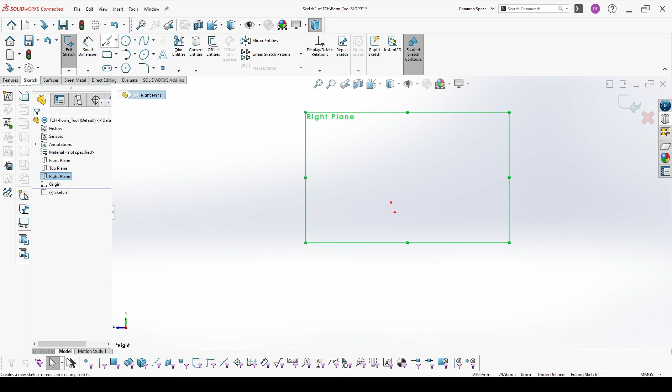In school we were bending the leaves by hand, but in this case I will use a form tool to have a nice shape of a tulip leaf. We start with the drawing in the right sketch plane.

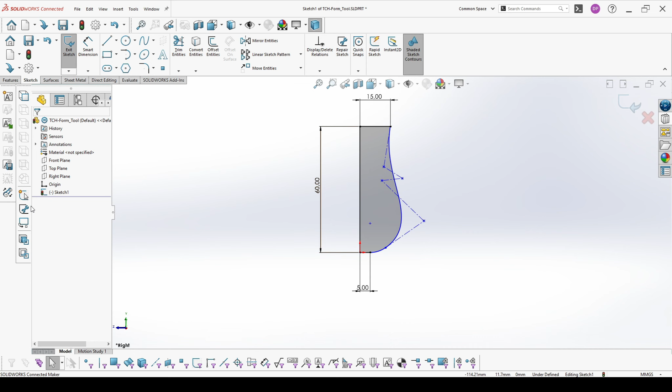Then we make a revolved boss base on 180 degrees, mid-plane. Then we add another sketch here to form the other shape of our leaf.

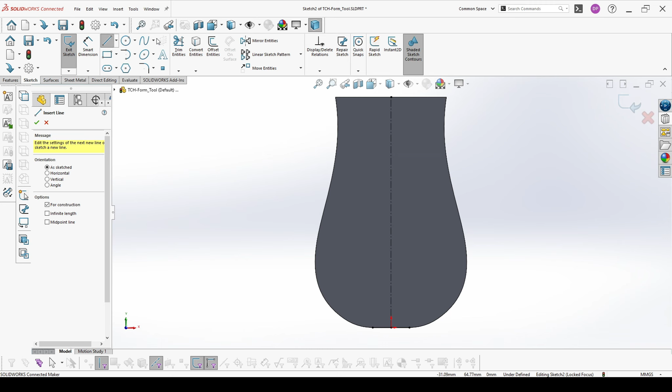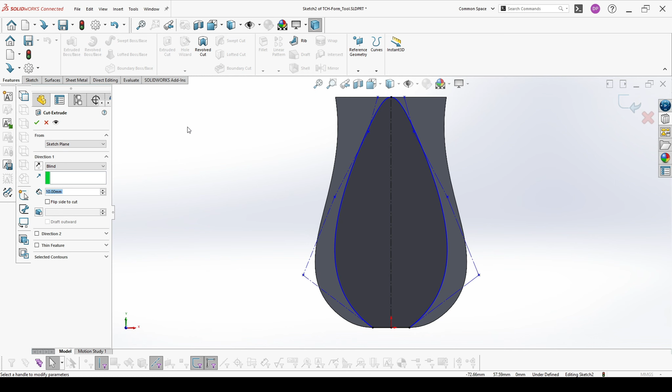Mirror this line so it's easier to control the shape in the way you want it. Then we will extrude cut with flip side to cut through all.

Move this face with 8 millimeters. And we have to form a little bit here the shape.

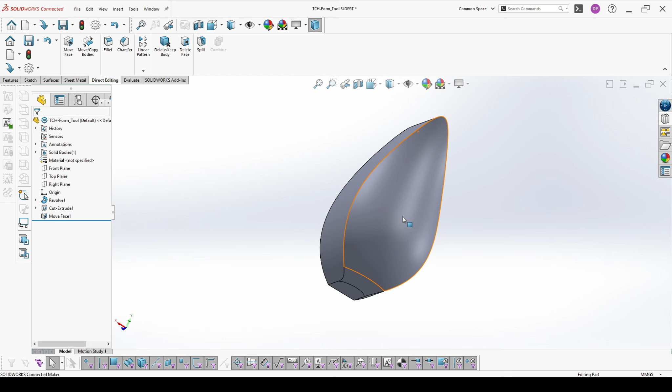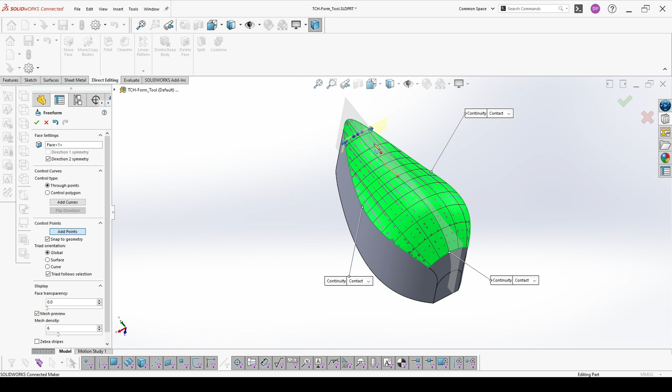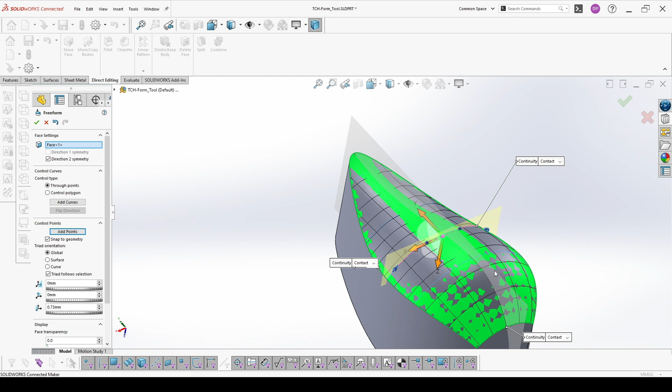For this I will use the freeform feature with symmetry. I will add some curves. Then I will add some points. And in the spaces where the leaf becomes wider, I will add some additional points. Then we go to move these points. And this is the shape of our leaf now.

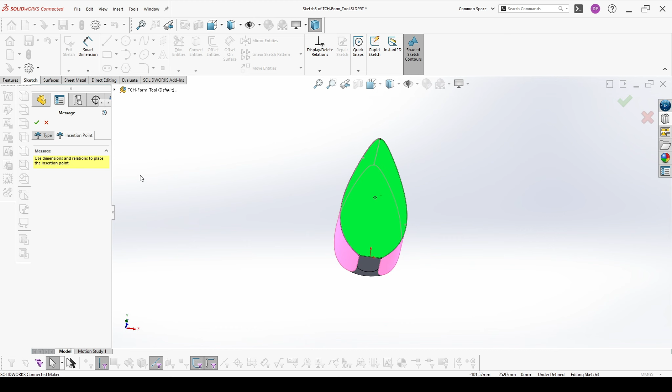To make it a form tool, we go to sheet metal, forming tool, choose a stopping face, choose the faces to remove. You can also move the insertion point from the other tab. I will leave it like this. This is how it will look as a form tool. And then we save it as new.

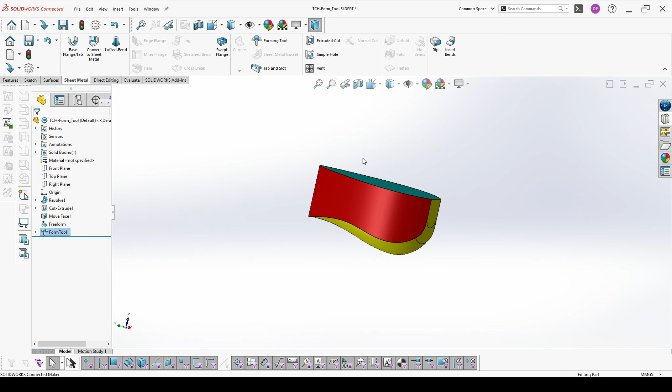Choose from the drop down menu form tool, and it will lead you to the forming tool library. Now, when our form tool is ready, our next step is to use it to form our leaves. We will need two versions, one for the inner circle and one for the outer circle of our tulip.

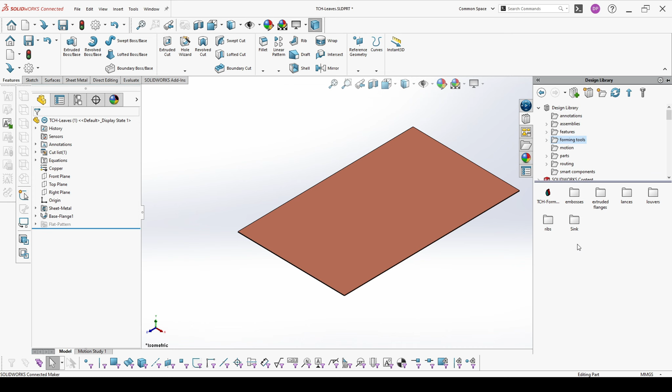To form a leaf with the form tool is really easy. We need a square metal sheet. We go here in the design library, forming tools, pick the tool we want to use and just drop it on the face. You can position it if you wish. I don't need that. I will just leave it like this.

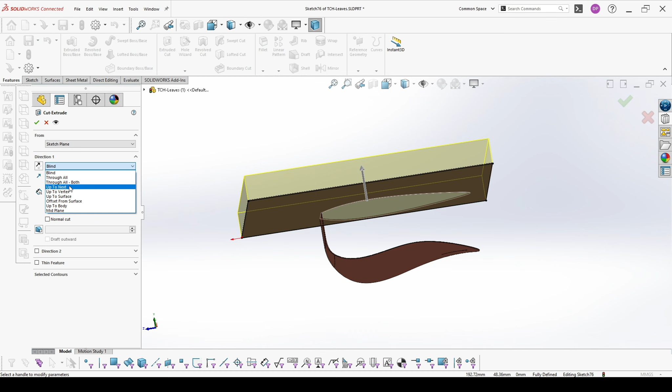Then we have to cut out the not needed parts. And this is the base for both inner and outer leaf. We'll just go to the other configuration and unsuppress it.

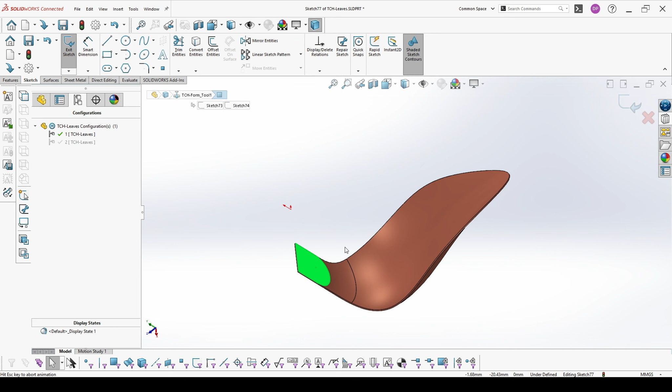Then we add another sketch. Convert this. Add a circle with a diameter of 4.2. Then define the area that we want to cut out.

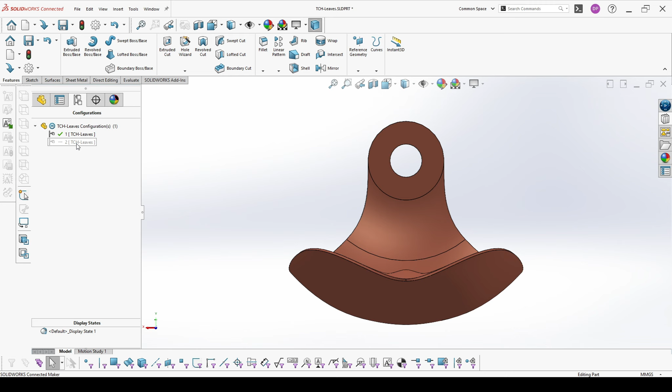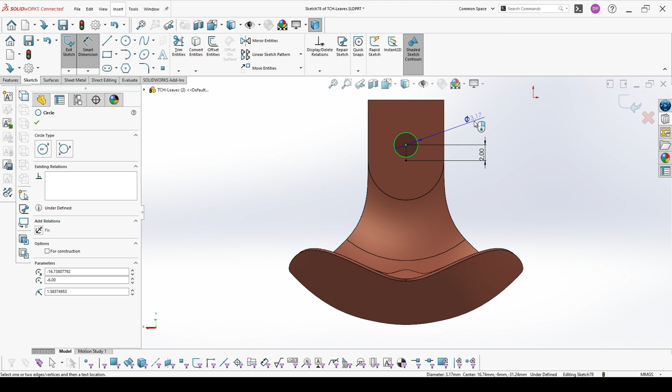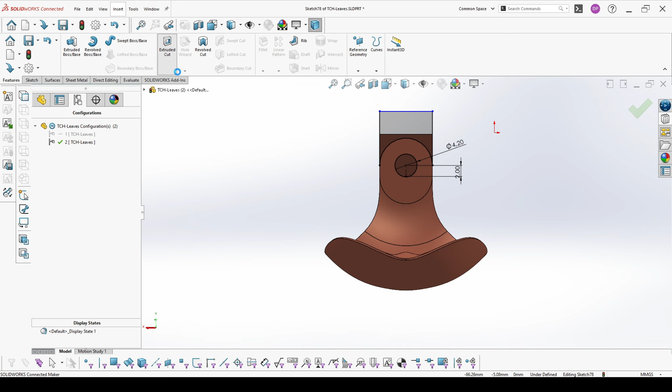And we go to the second one. Also add a new sketch. Here the hole will be on distance 2 mm from the other one. And both outer and inner leaf are ready.

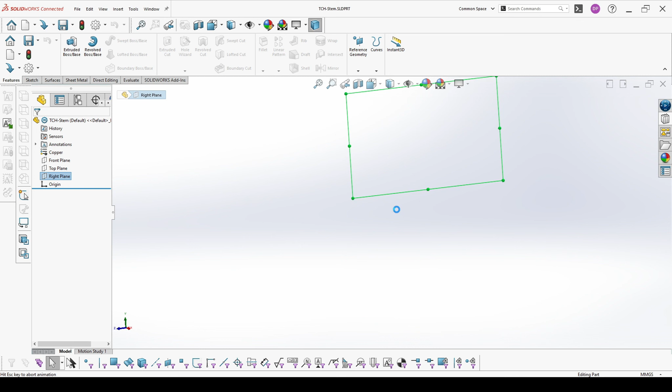Our leaves are already ready. Now we have to form the base, or as I call it also, stems of our tulips. For the stem I go to the right plane, add some center lines to define the sizes.

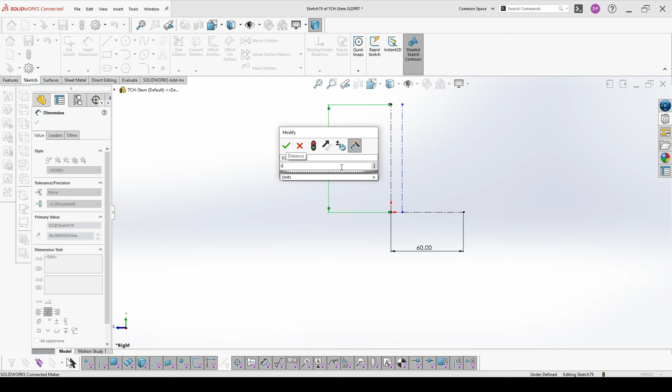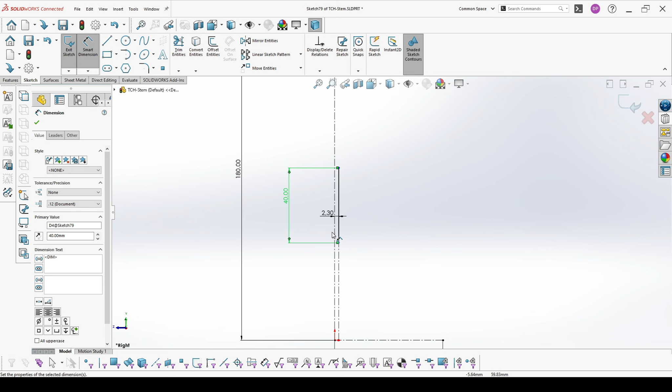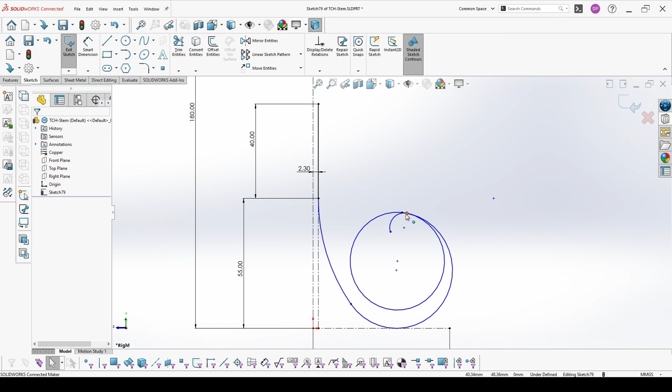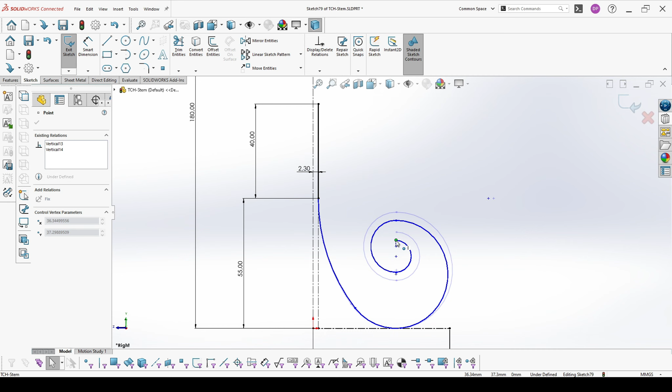And start making some profile. Then we make the top part.

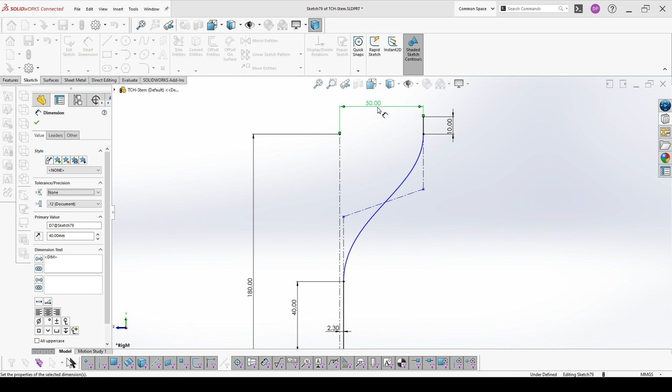And then we go with swept boss base with circular profile, 4 millimeter. I will round this edge here. Here on the top I will add a thread.

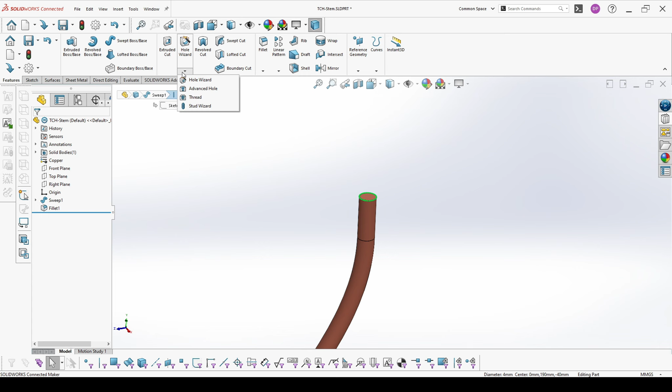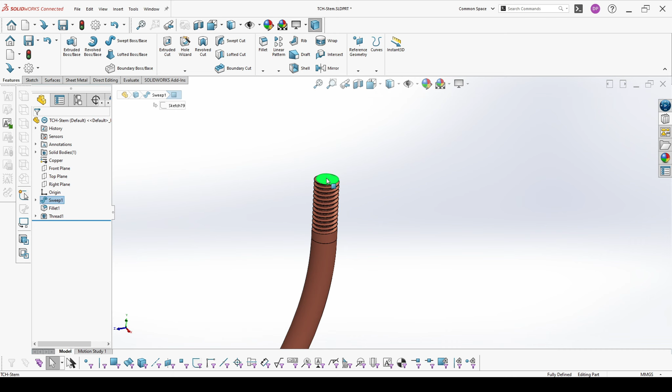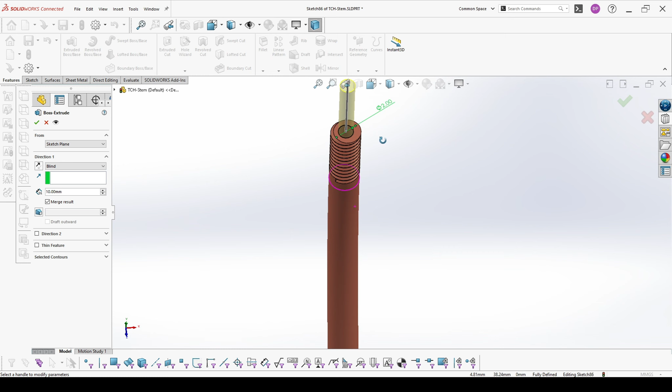Also I will add a new sketch with a pin area on which we will put our candle. We need also chamfer on the top.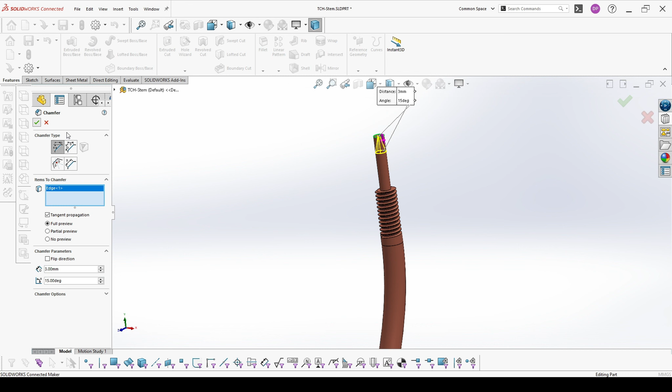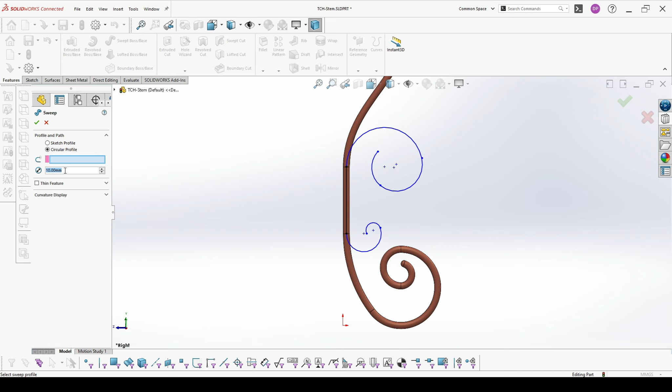I would like to add another detail. I will go again to the right plane. And we'll make another swept boss base with a circular profile of 4, not merging it with the previous one.

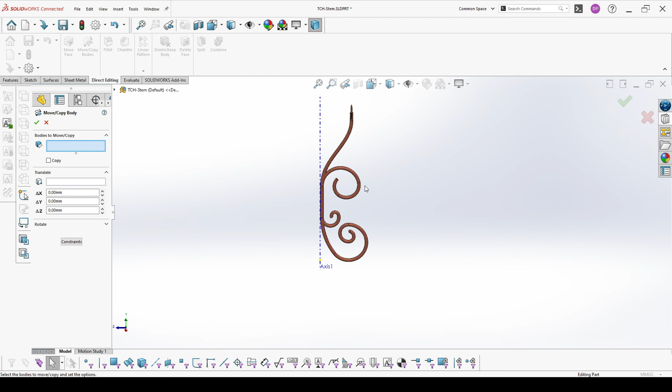Then between the right and the front plane I will make an axis. I will move this around the axis. We go to direct editing, move bodies. I choose this body. I want to rotate it around this axis on 30 degrees. Or actually on 60 degrees.

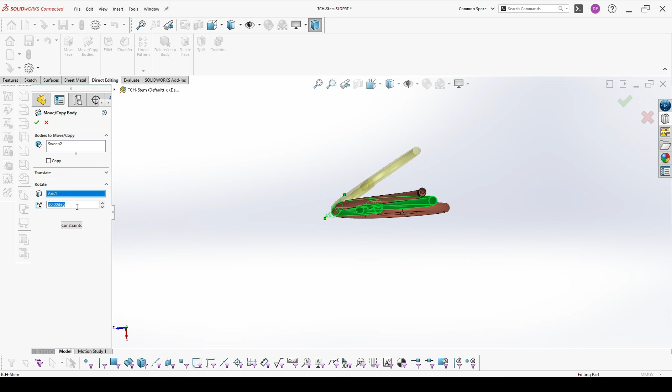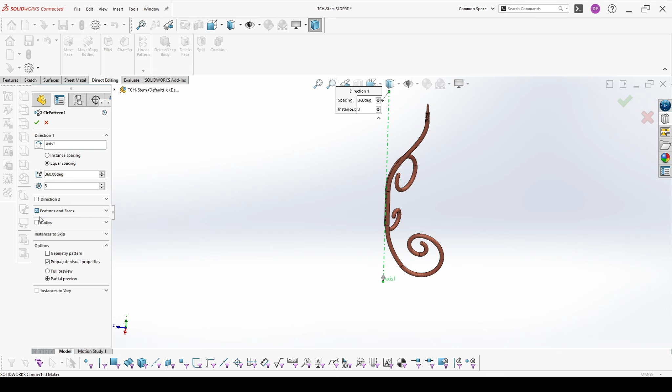Now I want to add also fillet here. And I want to repeat this 3 times. I add circular pattern around the axis. Choose bodies. So here it is.

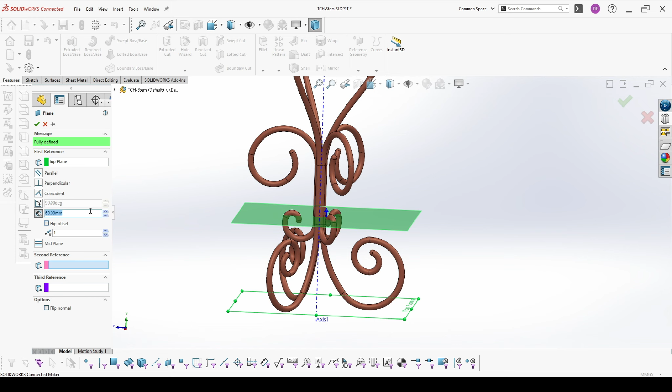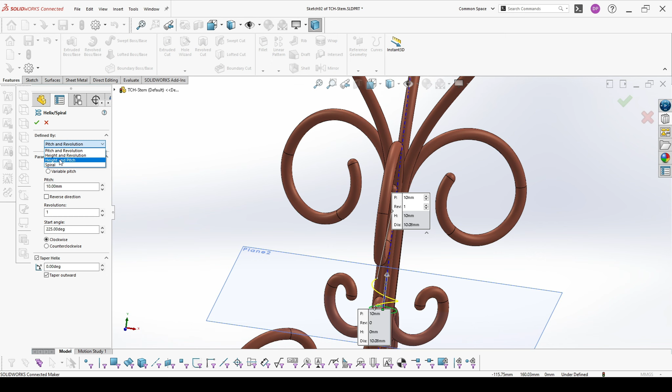Then from the top plane I will make a reference geometry. I will make a sketch on it. From this sketch I will make a helix. I will choose height and pitch. The pitch will be 1.2 and the height will be 40.

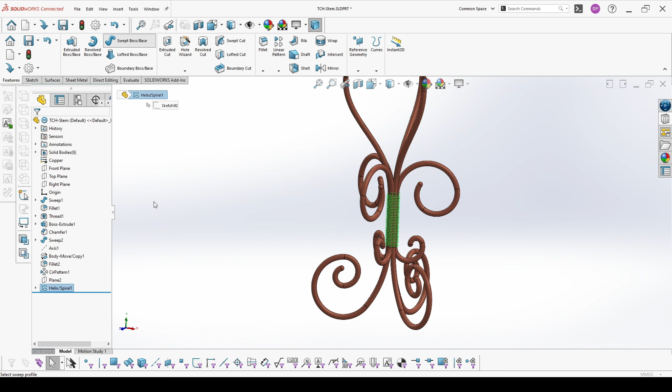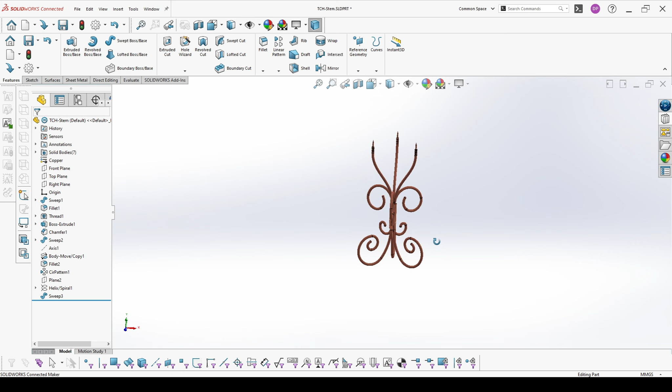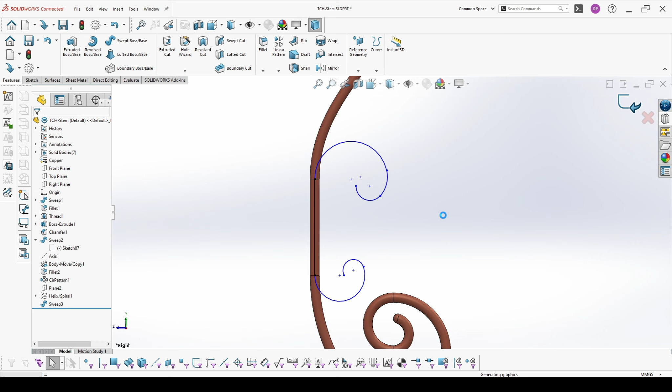And we're ready to assemble. With all parts ready, the only thing left is to assemble all together. First we insert the stem and leave it fixed.

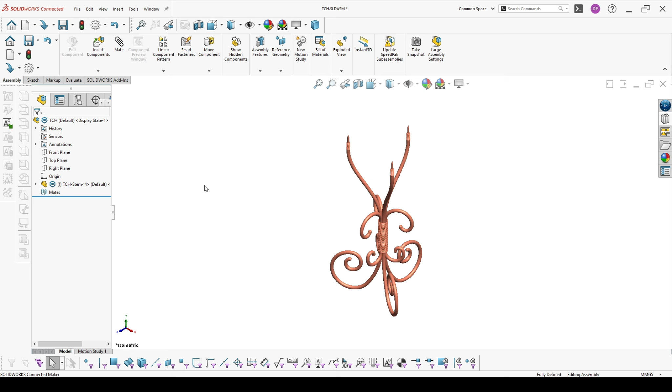Then we go to the design library, toolbox. At the toolbox we need a nut. I will choose the thin one with the size of M4.

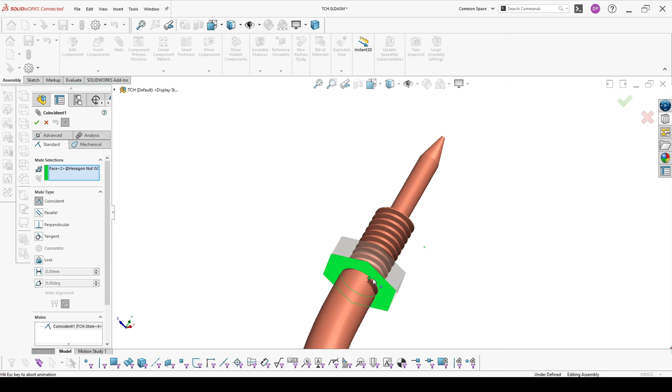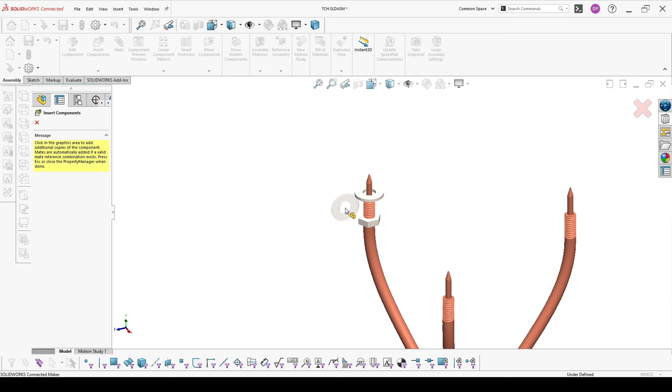Then I will need a washer. And last, I will need my leaves. First we will need the outer one.

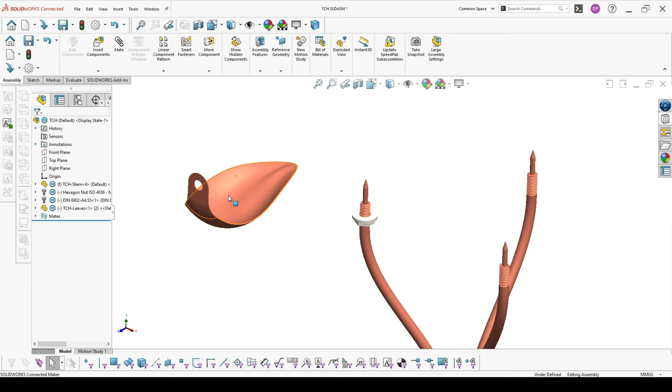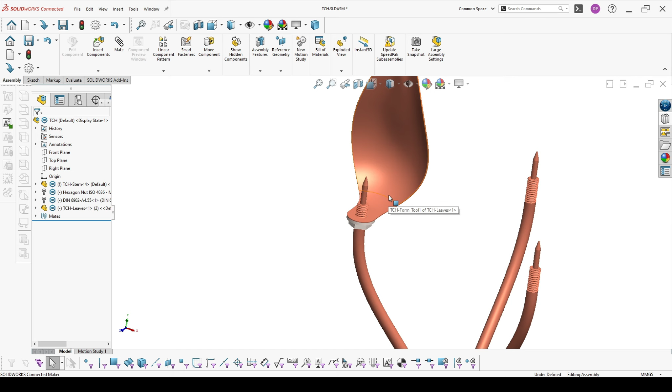Then we have to add a second leaf. It's concentric and coincident to the first one, and the right planes of both should be at 60 degrees.

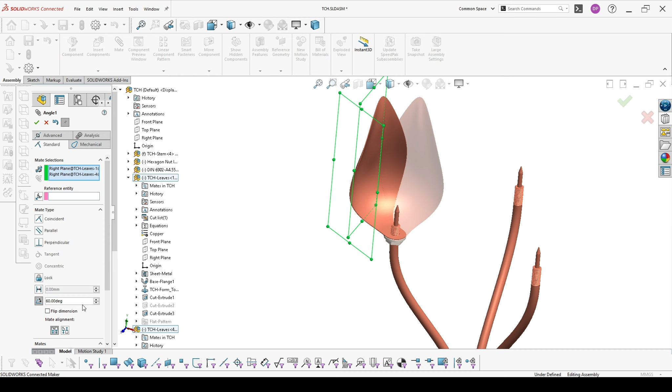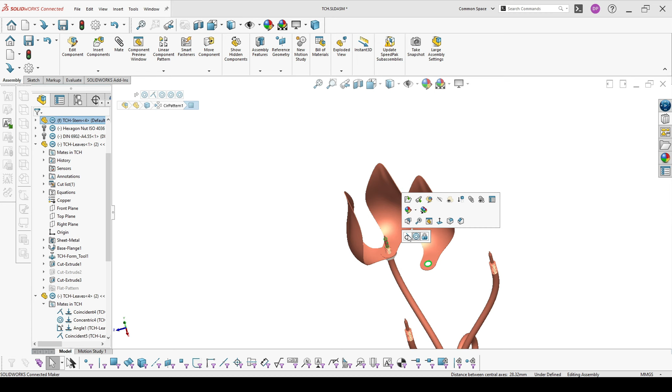We need one more. These are also on 60 degrees.

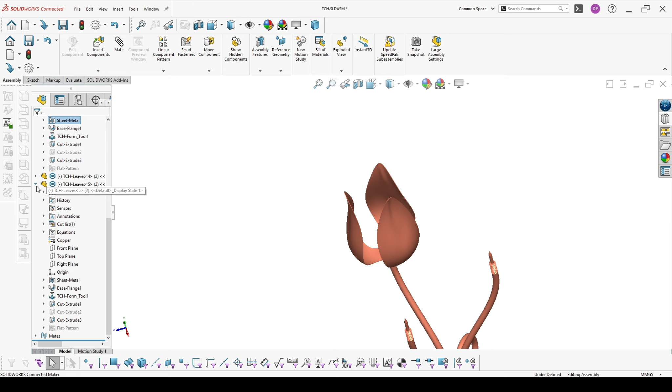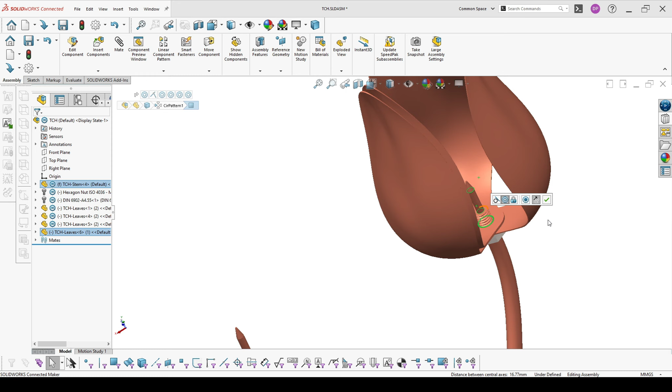Then we need the inner ones. I will drag just one of this one. Here's 120 degrees.

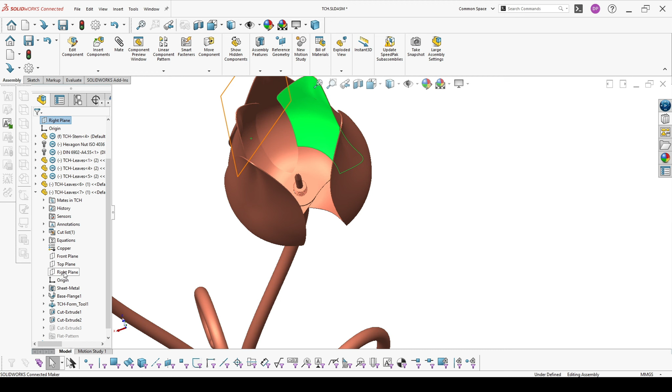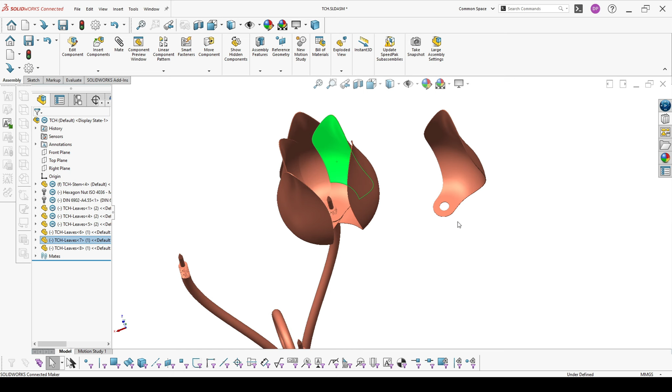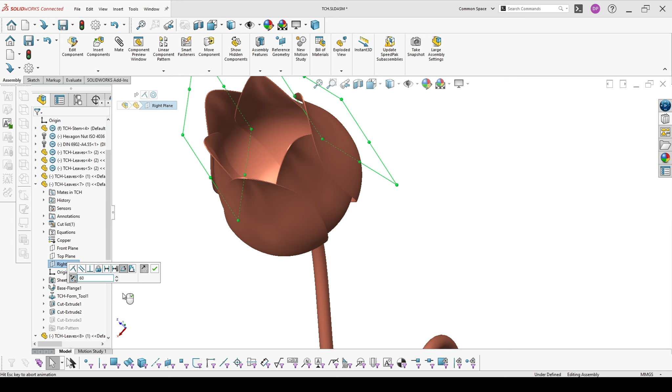And the last one. What we have to do now is to add one more nut from the inside. M4.

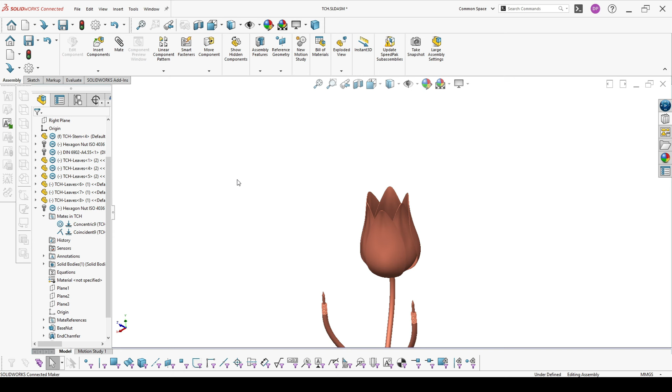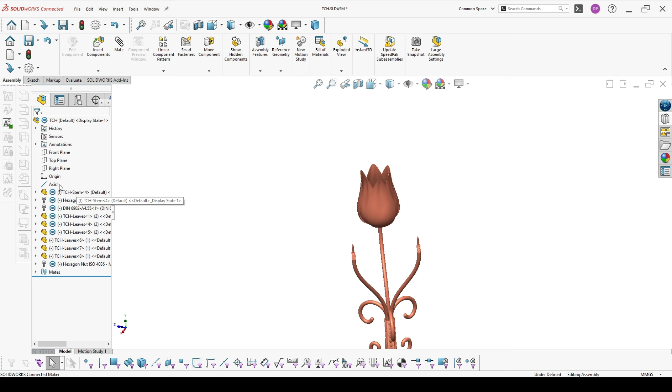And to repeat it for all, it would be best if we just make one axis, and we make a circular component pattern around this axis. Three times.